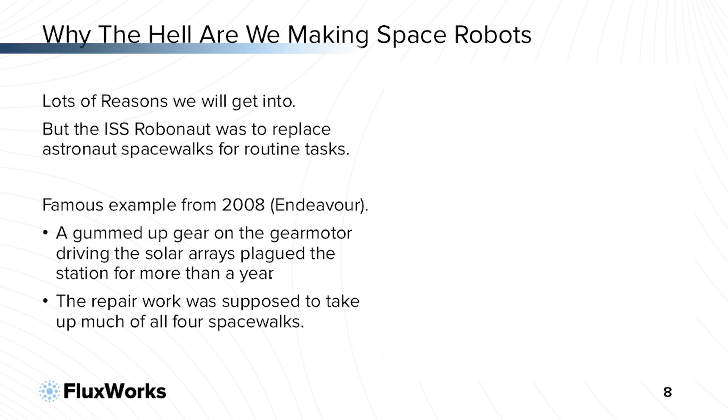So the Endeavour mission had 4 spacewalks that were a part of it, where 2 astronauts on each of those spacewalks were actually going out, and they would climb an 80-foot tether to get to this particular gear. They had a toolbox with them that had this grease gun, and they were going to replace the bearing and re-grease the gear. Does anyone know how much a spacewalk costs once you're already up there? It's about $1.5 million per astronaut.

And they had to do 4 walks with 2 astronauts each. Pretty famously, the toolbox flew away from the astronaut, and you can see a picture of it flying away there.

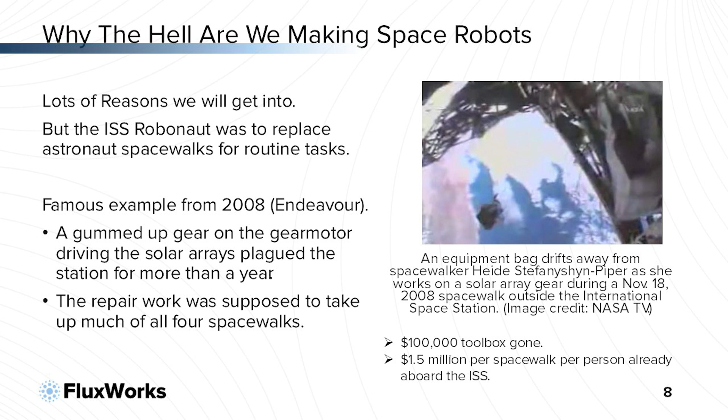And you can imagine how unsafe it is too to take on these systems. So the idea was they wanted a robot that could autonomously live full-time outside the station and crawl around doing maintenance to replace all these spacewalks. That's the second generation of this robot, called Robonaut.

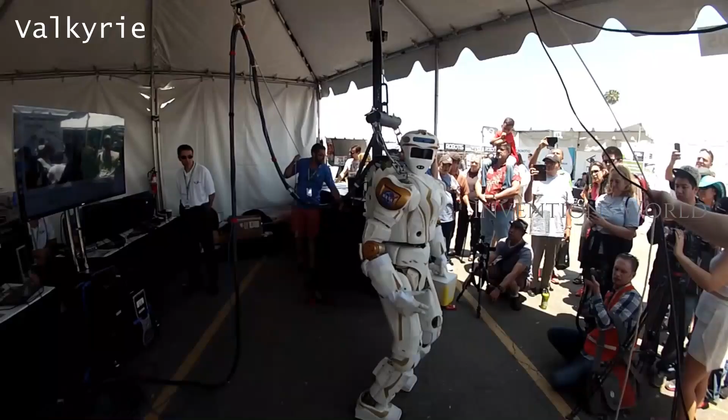Some people call the second generation the Valkyrie robot. It got a lot of attention, especially around 2015. Here's a little video from a recent conference that talks about one of the core innovations that makes this particular robot so special.

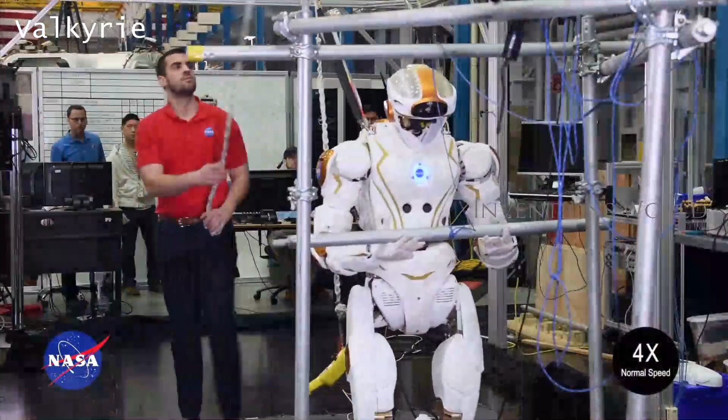You can see it's working with a human here, and what's special is all the rotary actuator joints in this robot have a series spring with them, in order to create a more compliant gear mechanism. They're adding artificial compliance to it.

When you add a spring in series to an actuator, you call it a series elastic actuator, and you put a strain gauge on it, which creates unparalleled torque sensing, so you can actively control the torque to a T for these robotic mechanisms.

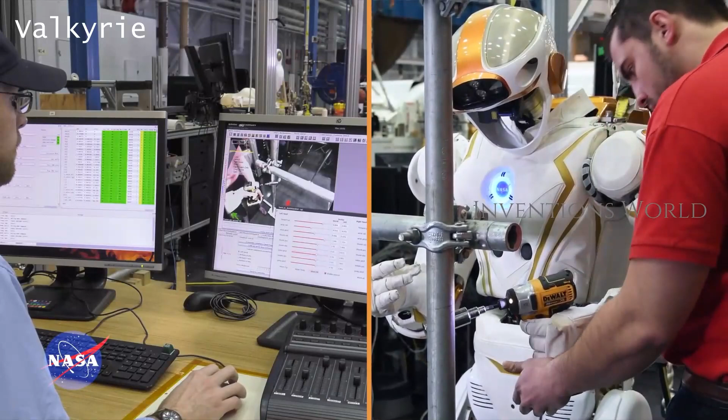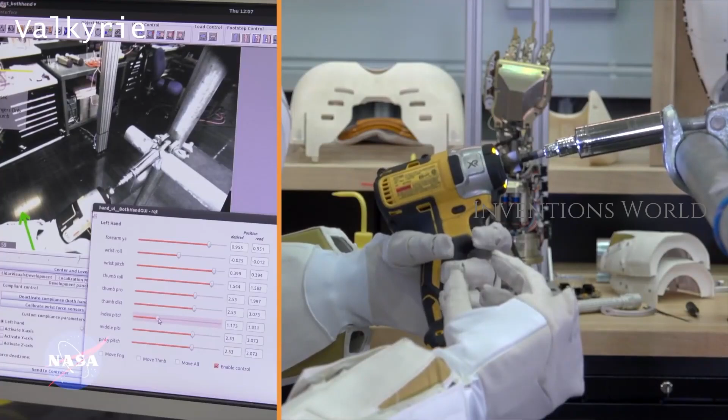There are modern demonstrations of robots being able to handle eggs with series elastic actuators without damaging the egg. It's an interesting technology that's been around, but it's really started to take off since this first robot.

But you can see that this one was still a little bit clunky. Sometimes people had to hand them tools and parts, etc.

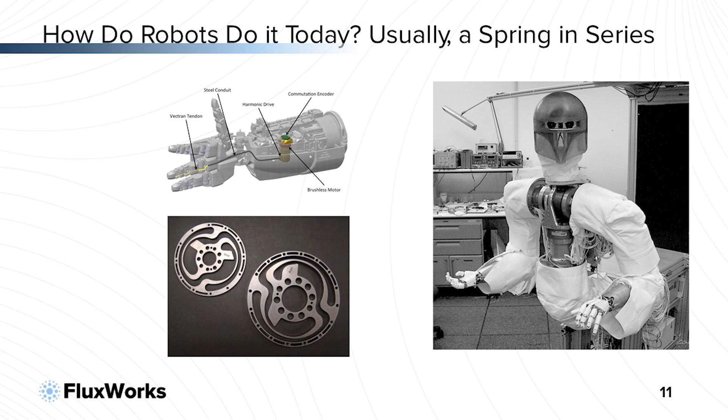So NASA needed a good grasp on it, but even still, it's pretty difficult as the temperature changes, even in terrestrial applications, to have an accurate strain gauge on it. I'm going to slow down and start getting into the technical weeds here, but giving a high-level picture first - that robot really started getting people excited about series elastic actuators.

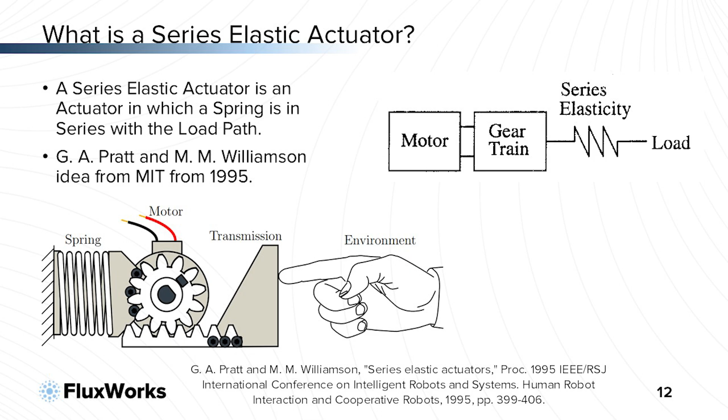The people who really first put this in a paper, the core innovators of this technology, came out of MIT. There was a foundational paper published in 1995 called Series Elastic Actuators, that really derives why this is so cool for modern robotics from a controllability and observability perspective.

So here's the commercial hand that is advertised as being able to handle eggs safely because it's so dexterous and has such precise torque feedback. So when asking who cares about series elastic actuation - is it just a NASA need?

Well, no, it really started to take off in advanced manufacturing - you can imagine handling of semiconductor wafers. It also started to take off in healthcare. Here's a pretty mature company that just raised $400 million, Harmonic Bionics, that actually uses them for human collaboration for physical therapy applications, so humans can really safely and gently work with these very springy robots with very springy joints.

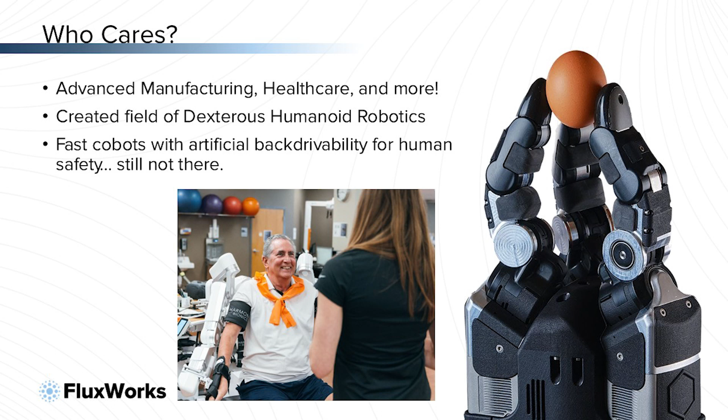One of the ideas people are trying to push on this - you're roboticists here, so you know some cobots struggle with speed, and some of these safety features they offer make it tough for these systems to move extremely quickly and still be human safe with a quick shut-off brake. There's videos of some early series elastic actuator robots where someone actually comes in contact with them, touching them with their hand as the robot is flying around doing pick and place, and it has an artificial back drivability - as you touch the robot, it just compliantly yields to the person touching it, as opposed to the robot having to stop. It's a really exciting idea people are starting to think about.

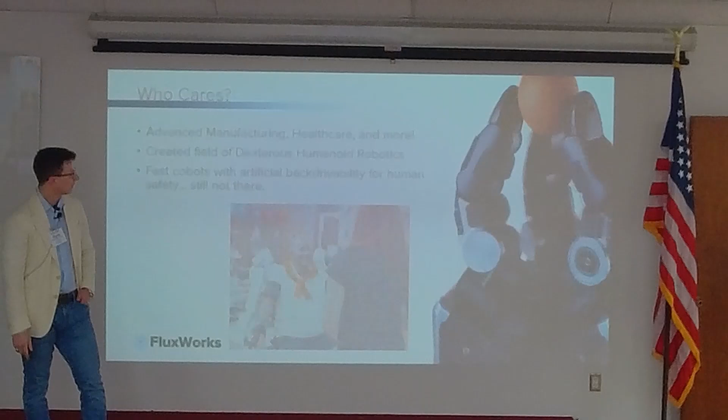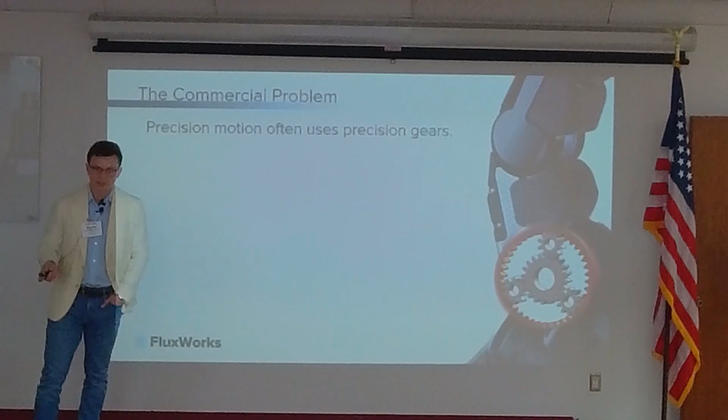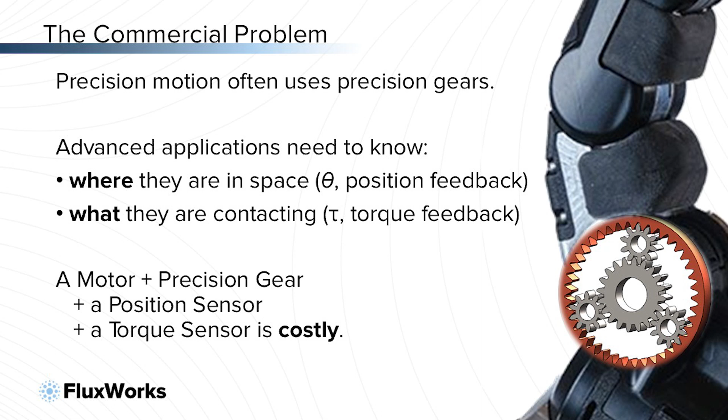But let's really get into what was NASA's problem and where magnetic gears came into place. These precision mechanisms use precision motors, precision gears, and because it's a series elastic actuator application, you add a spring and usually some sort of strain gauge, like a force torque sensor, because these applications need to know position and torque to fully do impedance control. So the problem, as you might guess, is this is expensive. Putting this in every single joint of robots like the Valkyrie robot was millions of dollars to prototype, and even at commercial scale, buying all these sensors and precision machined gears while trying to be backlash free - because that creates areas of uncontrollability - it can really start to add up.

But now let's turn it on hard mode. NASA, going back to the moon with the Artemis missions, is trying to target reaching areas where there is ice. The only place ice can exist on the moon is in permanently shadowed regions - craters so big that since the universe was created, sunlight has never actually hit the bottom of them. It's actually the coldest place in the known universe. There's no other naturally occurring place that cold, not even deep space, because at some point you're still getting starlight on you.

And by how cold, we mean it could be as low as 3 Kelvin. They're not sure, but the spec was written for 35 Kelvin. So you're getting pretty close to absolute zero - I think even electrons start to shiver at that sort of temperature.

And here's the rest of the specs: the low temp and then the high temp, a pretty nice 400 degree Celsius range, easy. Hard vacuum, and then going through launch it has to deal with massive acceleration - these are tiny, precise little gears and actuators. Also radiation on the moon. Have you ever tried to measure something with a strain gauge over a 650 degree Fahrenheit range? You get quite a bit of thermal expansion, and even the strain gauge itself is expanding at that time, so your readings are way off.

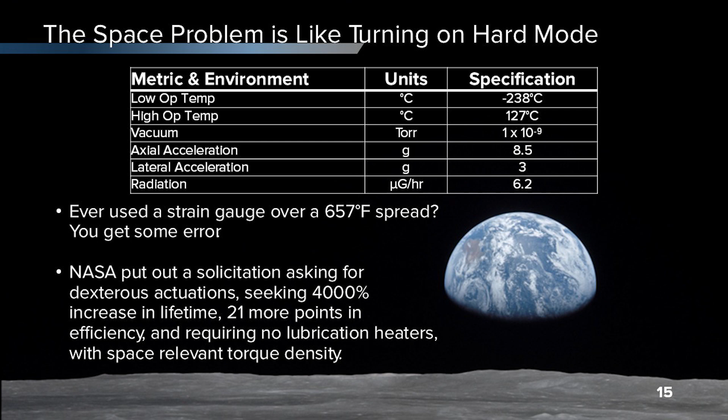Also, because it's NASA and they like to write really aggressive specifications, they put out an RFP asking for robotic actuators that can handle these temperatures for their future Artemis missions, but also, compared to the Apollo gear mechanisms, they wanted it to be 4,000% higher lifetime and 21 more points of efficiency, from 59% efficient to 80% efficient. Got the idea yet? This is arguably one of the hardest environments almost imaginable - a pretty aggressive specification.

So it is not possible to ratchet or strip a magnetic gear, which can be pretty attractive for applications where you might stumble into something or have a massive shock load that you don't expect, and you don't have to oversize your whole system for that.

Magnetic gears, because they're a spring in nature, a geared spring, y'all know Hooke's law, right? How much you displace a spring, if you know the spring constant, you know how much force you get. Well, same thing with a torsional spring. If you know the torsion spring constant, you know how much you displace it, you know how much torque you get.

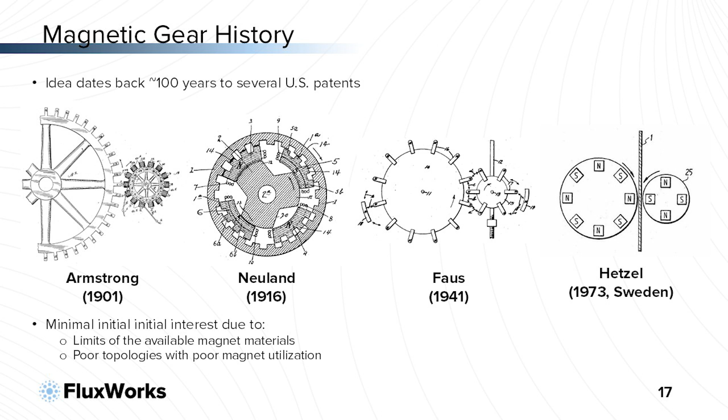About 30-ish years ago, and actually I was looking it back up again, I saw it was 2001, so I was wrong, it was like about 24 years ago. Some chap from the UK named Kais Atallah patented this type of gear. We're going to spend just a little bit of time, but not a lot of time, talking about how it works, because I want to talk about our gear and how we solve this NASA problem. But the basic idea that he came up with got people re-excited about magnetic gears.

The idea was, what if you make it a lot more like a planetary gear? You have three bodies, the sun, the planets, and the ring, and what you do is you fix one of the rotors, just like you do in a planetary gear, and you can get a gear ratio. But the way that you're actually getting the speeds to match - because north magnets and south magnets, they want to couple directly to each other - how do you get these two magnets to move at different speeds, and how do you get two rotors with a different number of poles on them to couple with one another?

Well, what you do is you modulate the flux. It's actually called a flux modulator in the original patent, and it's pretty cool because it sounds like flux capacitor. So we're getting pretty close to some pretty crazy sci-fi stuff, right? But what you're doing, and I like to compare it to electricity - I think it's not magic, maybe that's an electrical engineer talking - but you can think of it as there's places where the flux wants to go, and there's places where the flux doesn't want to go, just like an insulator or a conductor.

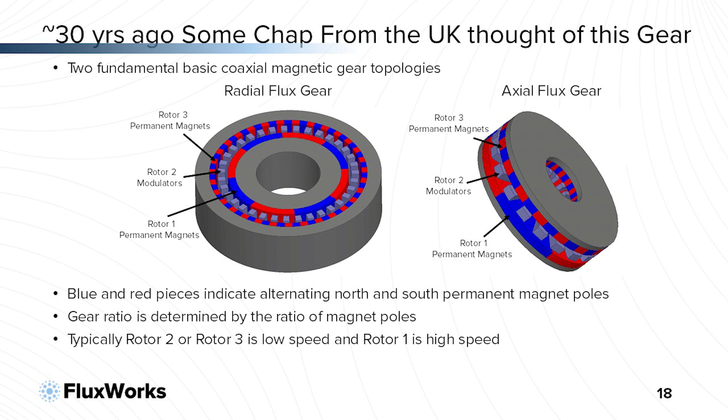So the basic idea is if you don't fix one of the rotors, this gear has a steady state speed equation. As long as this law is true, where the number of modulators equals the number of pole pairs on the inner rotor plus the number of pole pairs on the outer rotor, then you get this equation relating all the mechanical speeds of each rotor, and they all add up to zero.

If you fix one of the rotors, say the outer rotor, making it a stationary housing so that just the input rotor and the middle rotor spin, then you zero out omega 3 and move around this equation, and you get yourself a gear ratio. The ratio of omega 1 and omega 2 relates to the ratio of P1 and Q2.

I'll show you here two examples where you're fixing one rotor and the gear ratio that you get in the same arrangement. So it seems like a pretty clever idea that Mr. Atallah came up with out of the UK.

Here's a different visualization of it. We're looking now down at an axial version of this gear. I'm going to show you these two arrangements. One of them, the one in the middle, the modulators are fixed, and the one on the right, the outer rotor would be fixed.

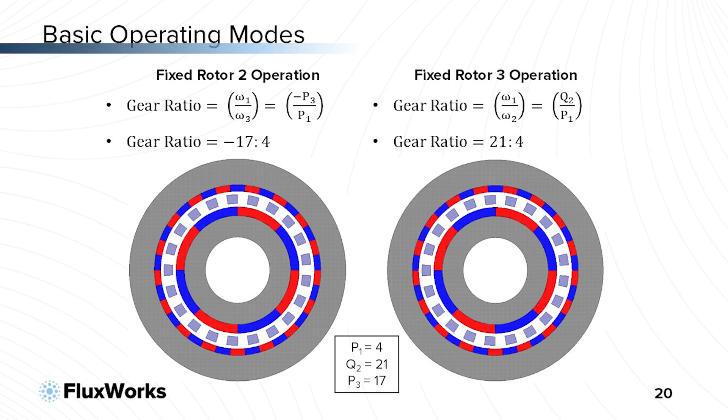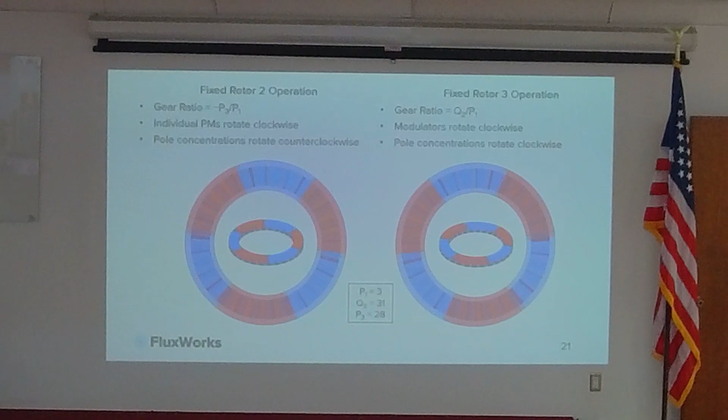So here's a picture of a simulated flux evolution, and one of our first prototypes that I built when I was in graduate school.

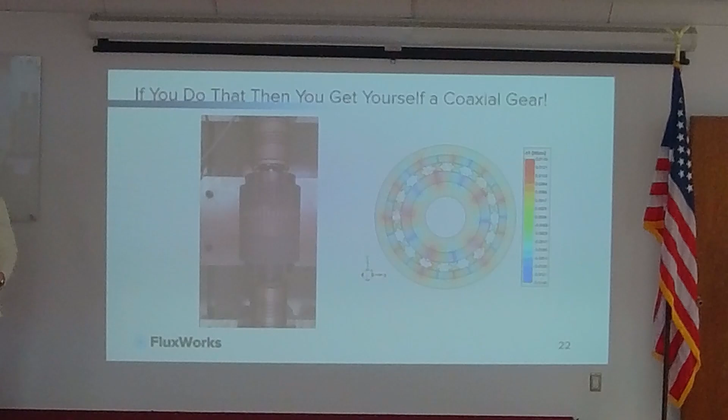But let's talk about our gear and our product. The reason it still wasn't enough for NASA is because after a massive spike in interest across the globe for this technology, right after the publishing of this paper, people tried to build prototypes left and right, and still no matter what, they could not get the torque per unit weight, torque per unit volume, and therefore the cost, they could not get them to compete with mechanical gears. So it still really had a lot of trouble taking off.

But there was so much hope in it, right? It was such a neat idea that you could potentially have this series elastic gear, you could potentially have this lubrication-free, contactless, ultra-reliable, super robust gear. And NASA was actually working on it, and they were thinking about it for applications like Robonaut as well as others.

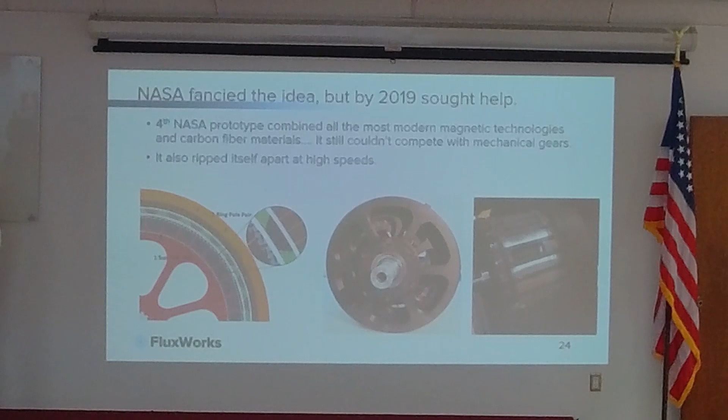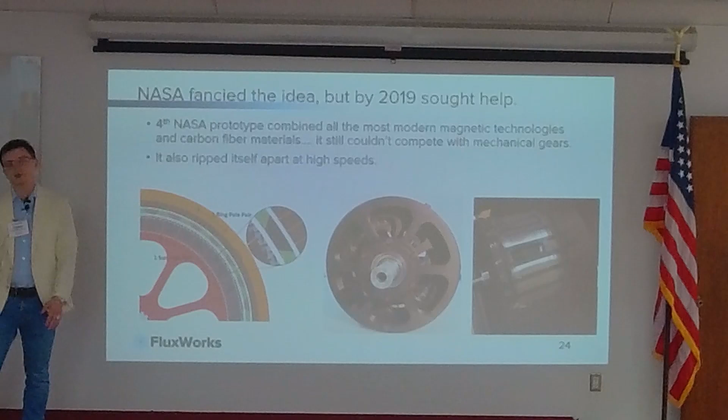So they got all the stops out. They did every advanced magnetic technology you could. They even sliced the magnets to be lamination thin. They used carbon fiber and materials that I can't name, and the thing still blew up and it broke. They tried to make the air gaps so tight and small to get all the best flux transmission. It still didn't work.

So they got frustrated, and after the 4th prototype and pouring a lot of money into this, they put out an RFP. And this space cadet right here is the one that answered it. That is me with Mr. Robonaut.

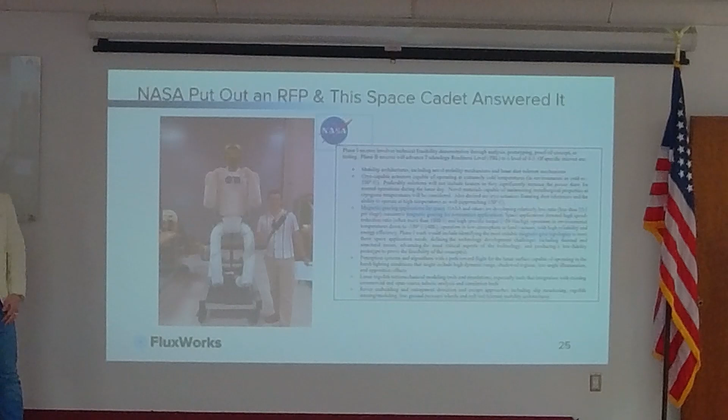So they said that they wanted magnetic gears for space, and they wanted a 1,000-to-1 gear ratio, which is stupid. And they needed it to compete with space-relevant gears. We did it. It was sick. It was awesome.

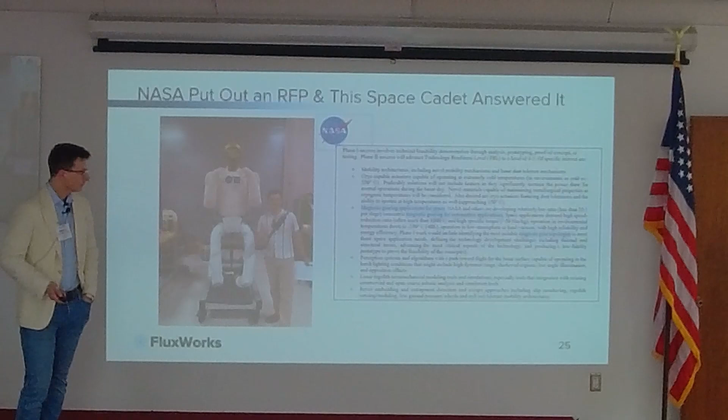We looked in nature for the inspiration on how this gear might work. So that's like Shaq or like a cat. I'm just joking. That is not what inspired me to make this gear.

No, it's a cycloid. Has anyone here heard of a cycloidal mechanical gear? Like a rotary engine. Yeah, exactly. It is just inspired by the mechanical cycloidal gear. It is just a magnetic cycloidal gear.

And the advantage of this is you get a massive gear ratio, and we're still modulating the flux just like Kais Atallah was, but instead we're just making the air gap literally bigger and literally smaller, as opposed to some fancy steel tricks, right?

I love the cycloid, I could go into the hypocycloid all day. I won't PhD all over you, but I'll give you a fun fact: the Steelers logo is a hypocycloid. How sick is that?

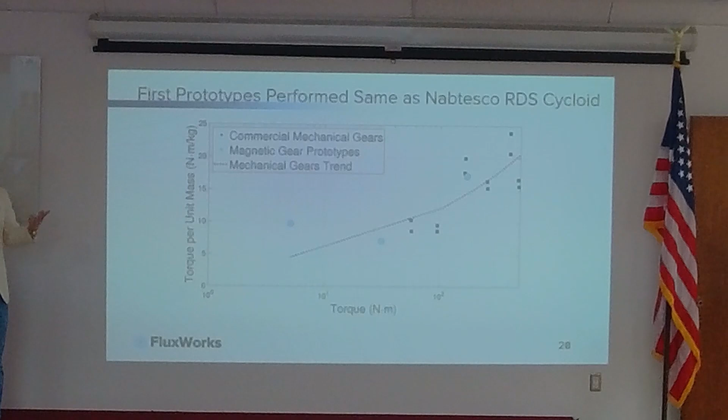The relationship between the torque and that loading angle is a perfect sinusoid. That's what got people pretty zazzed. There's no deadband area of backlash, no nonlinearity - it is a predictable sinusoid.

So here's an example: a 25-to-1, 4-inch diameter gear, about 52 Newton meters for this one. The stiffness relationship is just the derivative of the torque-angle curve, so you have a cosinusoidal predictable stiffness.

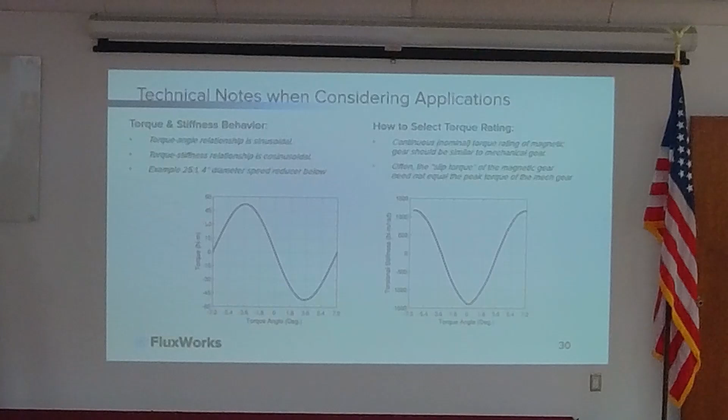Think instead about what you actually need to do to fulfill the mission or task, because we protect ourselves in the event of an overload. So a lot of times people base their mission spec around 20-30% of what the peak load is. So the model of a gearbox is pretty easy.

It's just two pieces of inertia connected by two ideal gearboxes and a little series spring right there. So if you're a controls guy, you can do a pretty easy controls derivation to figure out how to make some pretty smart, stable controllers for this.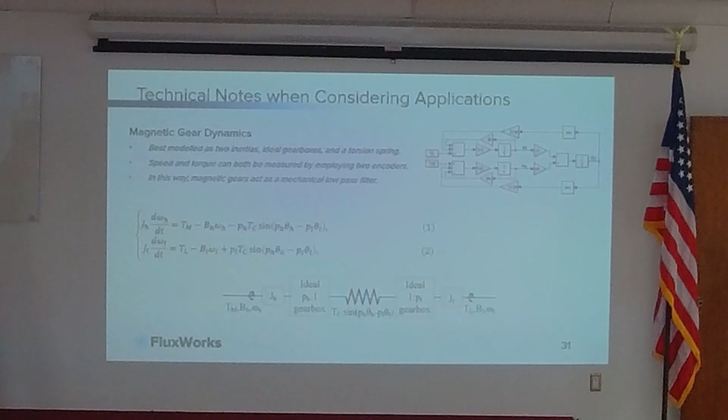We're still working with NASA, and the application they're particularly zazzed about in the future is this dexterous manipulator, because being a series elastic actuator, we're modelable, controllable, and therefore you can do lots of crazy stuff - not just touch the object gently and manipulate it gently, but we've already proven you can do stiffer-than-passive control, artificial back drivability, and intrinsic safety.

So this was the first NASA application, and yes, that got us started. But NASA is not a great customer - they only need a few lunar rovers and a few lunar robots. So when we started a company based on this technology, we started looking around in industry and asking where else this technology could be used. There's probably some applications y'all are already thinking of, but some surprised us.

In about a month and a half, our first gear will be installed at Blue Bell Creameries - so even just servo actuators in pretty harsh and extreme conditions like ice cream.

Turns out when you're shock loading it with hot and cold over and over, and you have an application going back and forth a lot, like pushing together two cookies with a piece of cream to make ice cream sandwiches, that's pretty harsh on the gears. Last year they had 5 of 49 gears fail. Every time a gear fails, they lose $118,000 in sandwiches not made. So it's a no-brainer to go from a $5,000 gear to a $10,000 gear, right?

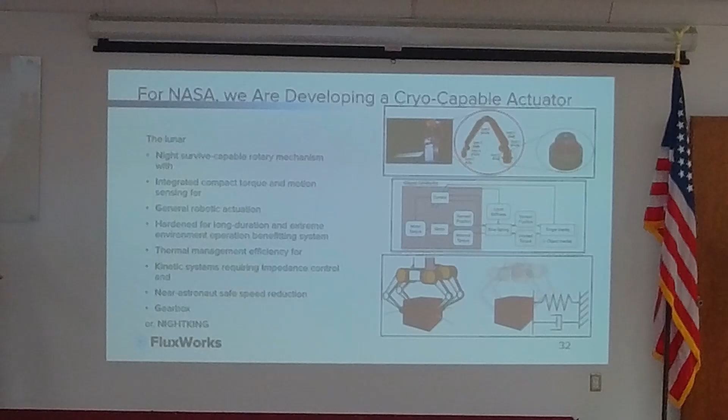When you're looking at these robot applications, yes, our gear is more expensive, but when you're dumping the force torque sensor, suddenly we're pretty competitive again for some of these applications. So we don't just make small gears, we've made big gears in the past, but right now as a company we're stopping at about 24 inches, about the biggest we're comfortable doing.

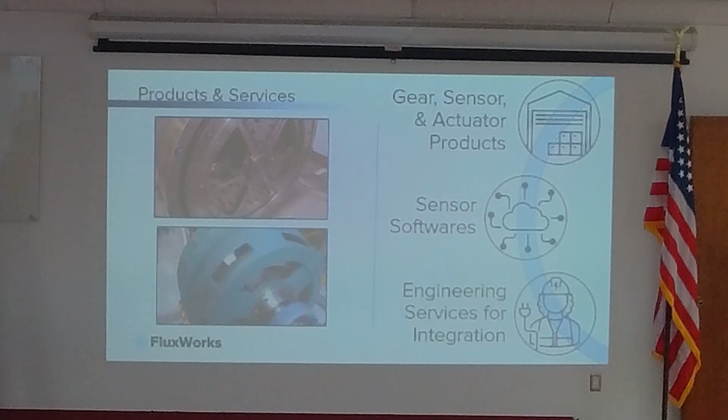We're up in Conroe. We've got 9,000 square feet of manufacturing, and I'll just jazz finger you if I talk about how great we are.

I would love it if you actually talk to our team. They're the ones that really have made our gears more affordable and really understand our customers even more, and what they're looking for.

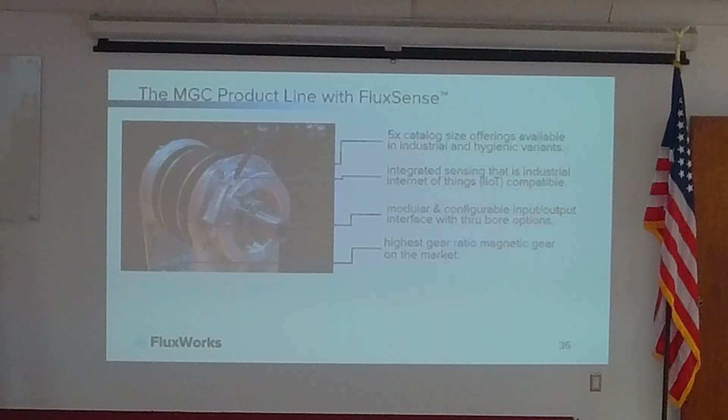This is an example of what we're getting ready to launch this year, where we've done a lot of work to catalogize these gears. So our website will be updated soon with a catalog of just 5 sizes is what we locked in on—5 sizes and standard gear ratios that match pretty standard robotic frame sizes. And we can offer it with integrated torque and position sensing capabilities. That's just an example of a few of those sizes.

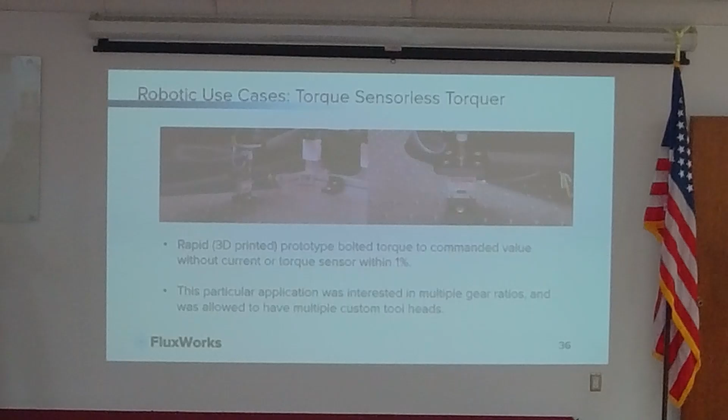Here's some other things we're working on. This is a 3D printed demonstrator using torque feedback control to screw in a bolt—just a rapid prototyping application. The reason this one was a rapid prototyping 3D application was because this particular use case was looking for changing the heads out as well.

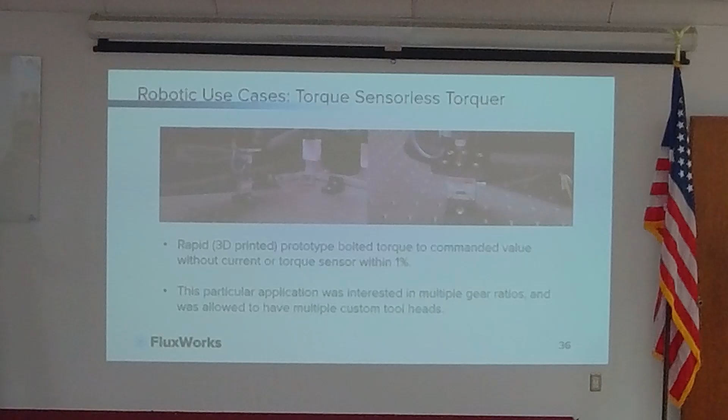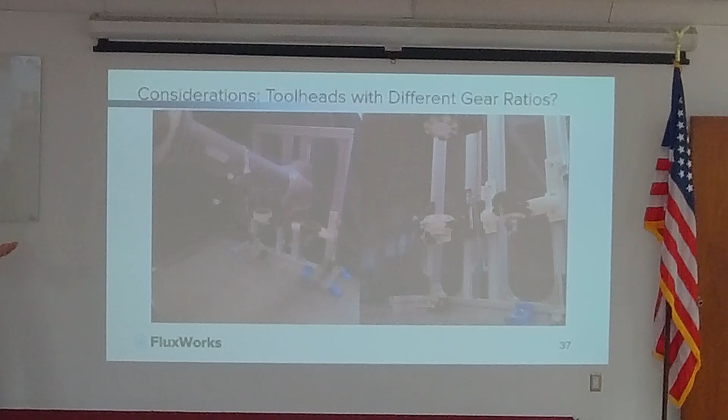This is something that NASA is really interested in because they can't afford to bring up multiple robots for different capabilities. They want really modular parts to be able to change out things like the end effector. So one new area we're also starting to explore is, since you can pull apart the two rotors pretty easily in our gears, here's a demonstration of a robot actually doing that. You can have one tool head on, maybe a Phillips, and what if you could just pop it off and change the gear ratio and pop in another one, and the gear self-aligns?

We're very forgiving of a little bit of tolerancing. You don't need some super precise harmonic drive style alignment.

So the nearest term application—if you go to our website, you'll see we have a launch coming up, and we're trying to show a few things. That is not a ray gun. Actually, that is a real tool that cost $150,000 that NASA used to buy to hand astronauts to repair things like the Hubble telescope. It's a pretty cool little screwdriver.

You basically set the torque that you want to bolt to, maybe 10 foot-pounds, and then astronauts just squeeze it, and it bolts to that torque. So it's got an intrinsic torque transducer, clutch, etc. They want to put those on the end of a robot and handle those extreme lunar environments, and that's the application we're working on with NASA.

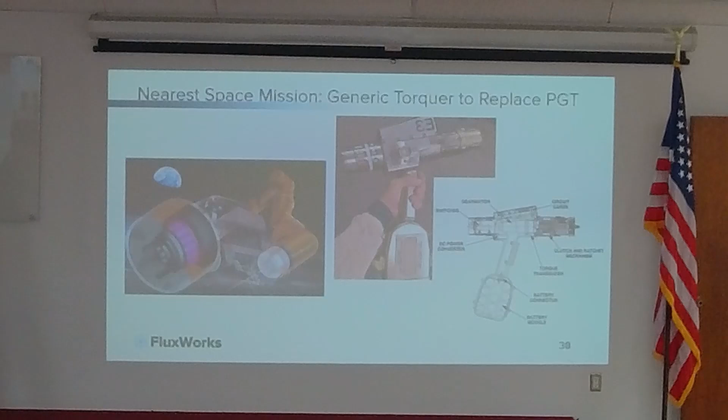It's been fun to continue to work with them. We've visited them. If you're wondering where your taxpayer dollars go, it's not just those $1.5 million spacewalks—they plate all their gears in gold. That's actually because of their thermal properties, not just because, but it does look cool. But yeah, that's where your taxpayer money has gone.

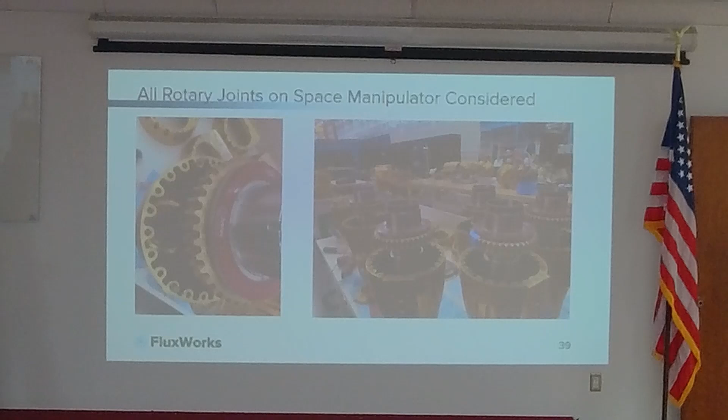It's their gearbox there. We've got our first launch coming up during Q&A. I'd love to talk about that. I'm pretty sure we're coming up on the time though.